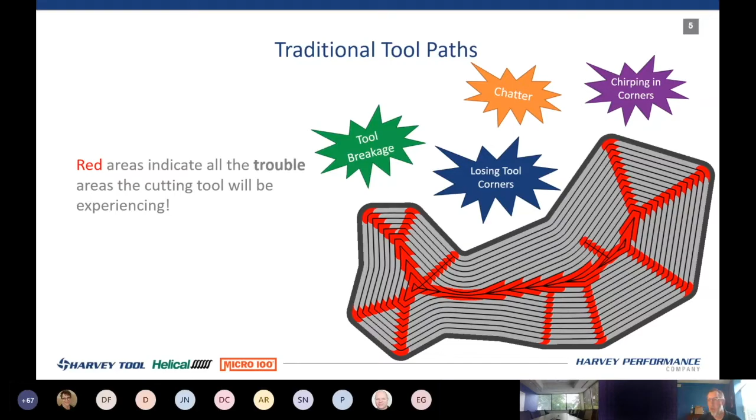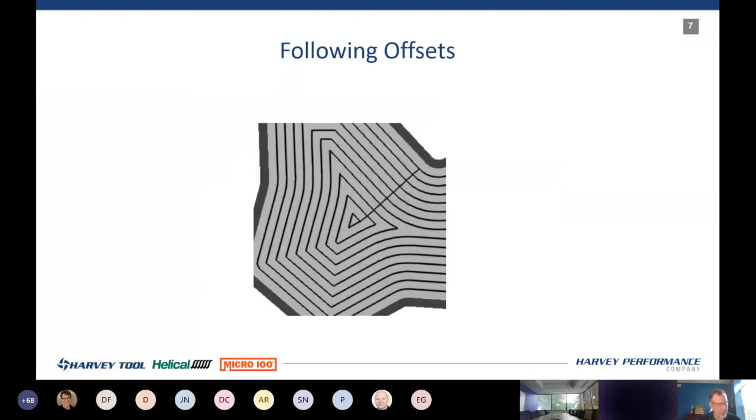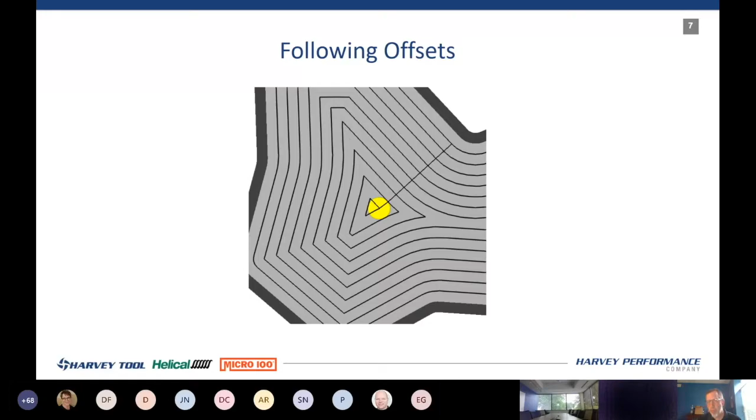So let's break down this tool path a little bit, just so I can explain what's happening in a traditional tool path. If we take a look at this, this is a pocket mill, right? Pocket mill, we think, hey, we're just cutting a pocket. It's a traditional tool path, we have an offsetting, but we're pretty much putting the end mill in a good situation. Well, after you ramp down or drill a hole, the first move that an end mill is going to make in a traditional tool path is what? It's a full slot. So the first path it's going to make in a traditional tool path is going to be a full slot. Anybody out there who has machined with an end mill knows that a full slot is going to create a bad situation.

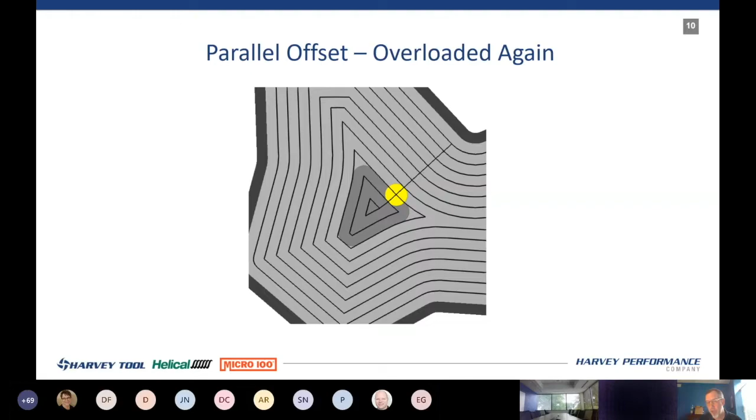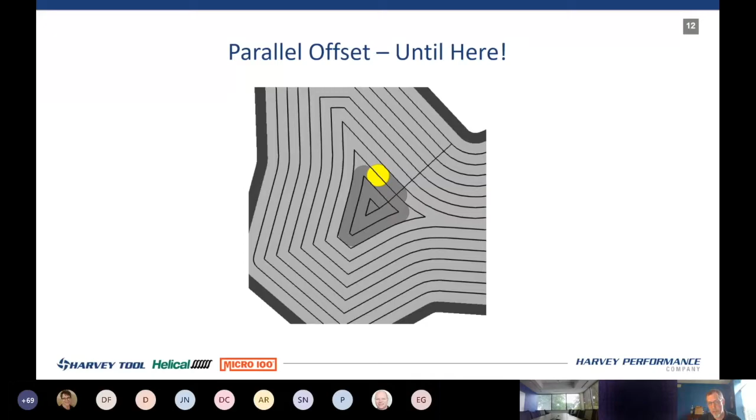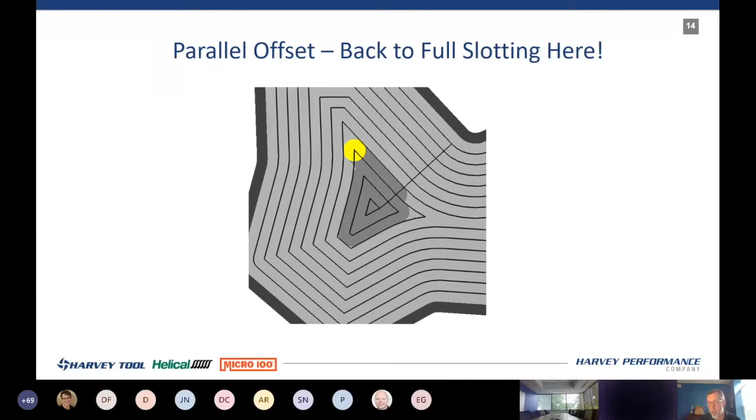So after we clear out a little bit of that and make another pass, we're doing a parallel offset, and look at what happens again. We're engaging the end mill again in more of 180 degrees of a radius. So again, full slot condition. As we're running to the corner, things are looking good. This is kind of where we all program things, right? In a traditional like this, it's a peripheral cut. I'm stepping over 40%, here's my speeds and feeds. Not when you're getting into that corner. You start getting into that corner again, where we're going to make another move, and we're actually in a full slot condition again.

Even if we come from the outside of the part in a traditional tool path, what's the first path we're taking? It's a full slot condition. So the right way to program any kind of traditional slot or a traditional pocket is by what? Worst case scenario. So this whole tool path that I just showed you should be programmed with worst case scenario, which means if you want the best life out of the end mill and you want that end mill to be predictable and work well, you have to program this for a full slotting condition.

Which is going to reduce our speeds and feeds. It's going to reduce how much axial we can take. It's going to reduce how many flutes we can take. And we're going to have a lot of scenarios and a lot of conditions that are going to put the end mill in a bad situation. Now, we're leading up here. This is like a story. So high efficiency milling, what we're trying to do is we're trying to take all the conditions out that make that end mill struggle and make it smooth. So the last thing and the last problem you have is going to be the end mill. We don't want you to worry about the end mill.

So milling challenges, again, machine tools: older machine tools, limited processing speed, limited look-ahead ability to actually read the code. A good example of that is maybe a traditional toolpath, if there's any G and M coders out there, might be 500, 600 lines of code at 12 inches a minute. Well, when we do an HEM or a high efficiency toolpath, that now just went to 10,000, 20, 30,000 lines of code, depending if you're putting a micro lift in there, and you're now running at 150, 200 inches a minute. So the processing speed on that machine has a lot to do with it.

Let's take a look at another challenge, part fixturing, right? Part fixturing is a big one, especially as your materials get more heat resistant and harder and stronger. We have rigidity issues with this, right? We have part movement, depending on how you're holding it. Support is a big one, right? Anytime your tool or your material is hanging over the support mechanism, it becomes like a diving board. And the diving board, the further you get out, the more it's going to spring up and down, the more it's going to be detrimental to your tool life. So it's important to be mindful of these things.

Clearance. How big are the toe clamps that are over the top of that part? How much are they hanging down? How much do I got to pull out that end mill? Clearance is a big one. Location. I love to bring up location when it comes to horizontal. I've walked into shops and I see where the vise is on a horizontal tombstone, and they'll have the vise all the way at the top of the tombstone, but nothing on the bottom. Be mindful that if you can bring all that down, that center of gravity, the rigidity, all the way down on the fixturing, you're going to have a greater chance at success.

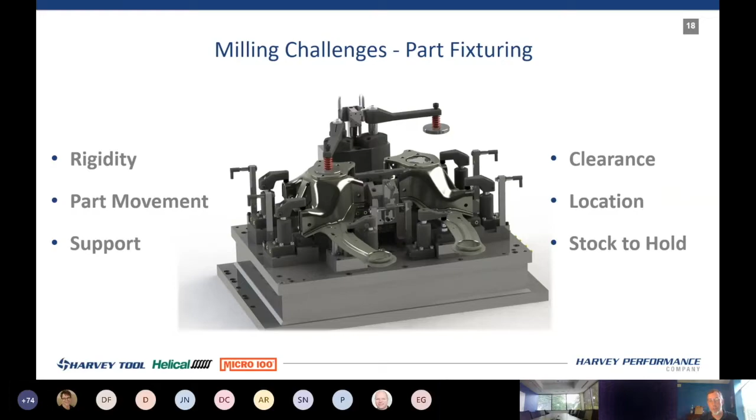Stock to hold. What does your stock look like? If we're running a casting, you might run into a fixture that looks a little bit like this, but you have to be mindful on support, rigidity, and everything to make sure that your part's not going to move, because that's where you're going to get your chatter, and that's where you're going to get all your chipping, vibration, and tool deterioration.

Tool holder accuracy, right? What's our holder look like? It's very important. The part that connects the tool to the machine is the holder. It's important to get a really good holder. Old technology holders, side lock. People will still use side lock. Push that end mill to one side, you get TIR, you get indicator issues, you get vibration in there. It's important to make sure that your holder has good taper condition. Pull stud is in good condition. I've seen a lot of people where they're not mindful of the pull stud.

It's important to make sure the pull stud matches the machine and is in good condition and tight. Excessive runout: we're looking for 5/10 or less. You should demand 2/10 out of your holder all day long.

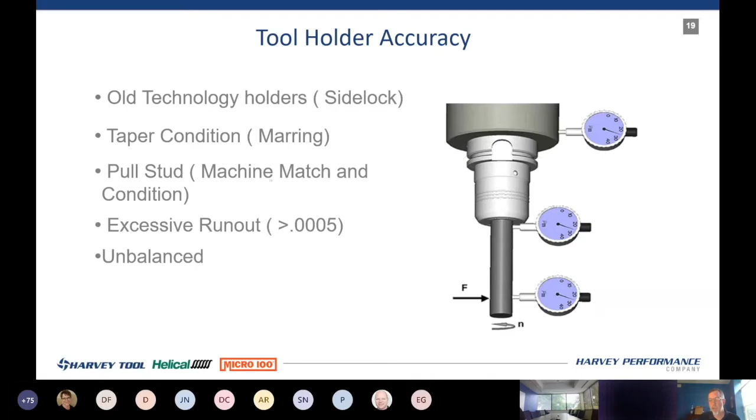That is not something you shouldn't ask for. And unbalanced holders - it's important to make sure the holder that connects the tool is very important.

Underutilized tooling. So now we can start getting into the tooling. If you're running a traditional tool path, we already know right away with that tool you're using it's going to be underutilized, which means we're going to run a conservative speed and feed. We're going to run a smaller axial depth of cut with long lengths of cut. This is where we're just dropping down 15, 20, 100 thou with that end mill, even though we have a length of cut that might be 1.25 inches, 1.5 inches.

I always say it's like going to Subway and buying a 12-inch sub and only eating 4 inches of it, throwing the rest in the garbage with no intentions of eating the rest of the sub. Buy the length of cut that you need for your situation and that end mill.

Now, if you're running a prototype, it's a little bit different. So I'm not standing here slamming my fist down saying you have to use that type of tool. But if you're running a production environment, it's very important to use the length of cut on the end mill that's going to be conducive to your program.

No corner radius - put a corner radius on there. It's underutilized tooling; you get poor tool life, unpredictable failure. We're trying to get predictable failure. We want it to be predictable.

Deflection. We get a lot of deflection by taking light axial depths of cut and heavy radial depths of cut, which is going to bring in your chatter, and it's going to give you low MRR that we're going to actually talk about. So now let's just dive into what is high efficiency milling.

What is this? We like to say the 3 T's of HEM over at Harvey Performance. You have the tool path, you have the tooling, and you have the technique. Those are the 3 things.

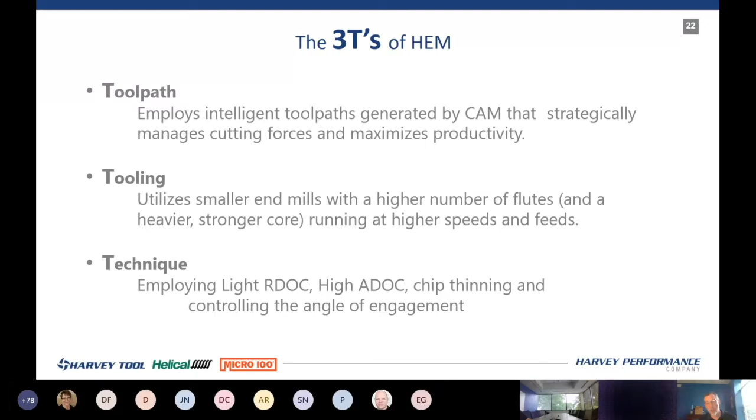We're going to control the angle of engagement, which means if we control the angle of engagement, we can control how big the chips are, and we can control how many flutes, and we can make an end mill that's a lot stronger. So those are the 3 T's.

Intelligent tool path - now you can take a look at this strategy here. And this strategy, instead of slamming into corners, we're actually picking out the corners. This is a dynamic toolpath from Mastercam. This is something that is within the CAM software that's going to manage the forces on your end mill. That's what we want to do - we want to manage the forces with HEM on your end mill.

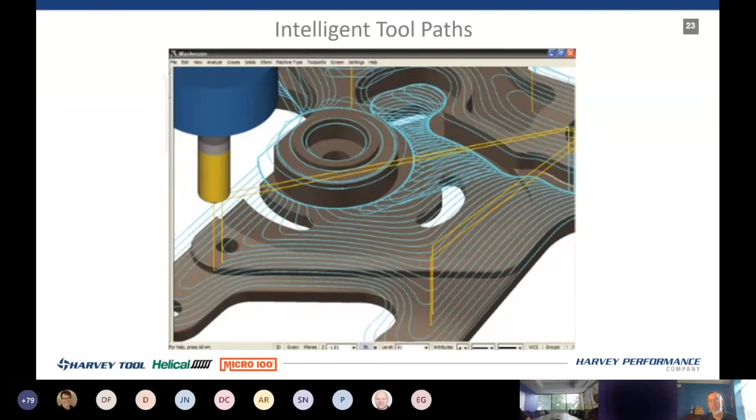Dynamic toolpath is going to do that. And you can see in this where it's actually picking out the corners and making sure that end mill is in good condition. So now that we're taking light radial depths of cut, we're taking heavy axial depths of cut, instead of using the 2, 3, 4 flute end mills, we can start going up to 5, 7, 8, 12, 16.

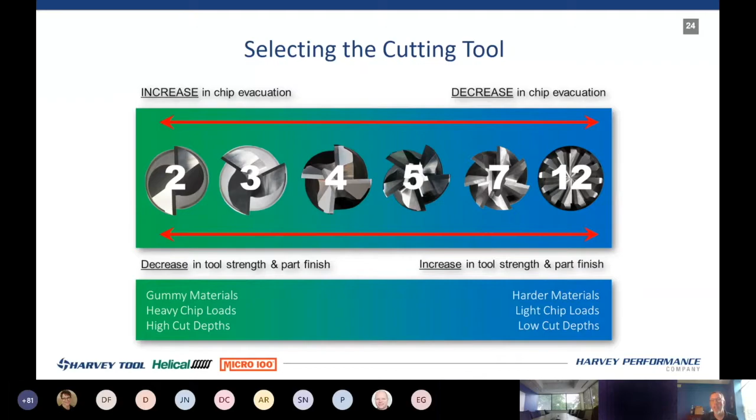You can really start managing your end mill with your flute count for your material, your radial step over, your core strength, your rigidity, and everything else. So now that we can get a tool path that's managed and a strategy for HEM, we can really start utilizing the tool and making sure we're using it to its fullest potential.

So you don't get a stabilization of the end mill, okay? And this is what brings vibration. It's kind of a slapping effect: one flute in, one flute out, one flute in, one flute out. And we get a lot of chatter and chipping that way.

Because we're taking a light radial depth of cut, we take the heat out. Now we get rid of the heat. Heat's going to deteriorate the end mill, so now let's get rid of the heat by actually employing a lighter radial depth of cut, which means the flute is in the cut for less time.

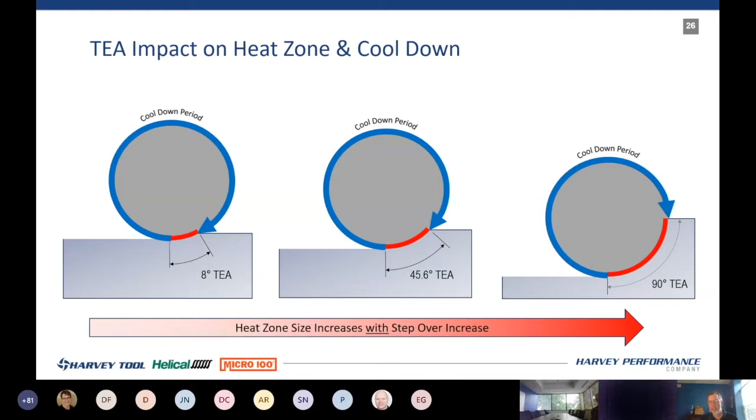So this is a great slide, and this is a great way to understand if you're cutting Inconels, Hastelloys, Monels, Nitronics, 13-8. Take a look at your radial step over and see if you can back off that radial step over to reduce some of the heat, depending on what your end mill looks like, and you will start getting better tool life. Now, it's not just the radial step over, understand that. We're going to dive into it a little bit more, but it's not just the radial step over.

There's a combination: chip thinning. Dangerous word, chip thinning. Chip thinning is basically when you take an end mill and step over less than 50% of the diameter. A good example is a half-inch tool: if I'm stepping over that tool less than 250 thousandths, it causes the chip that's formed to be less than what you programmed. So if you program a tenth-of-a-thou chip, inch per tooth, and you're at a 10% step over, that inch-per-tooth you programmed, that chip becomes a lot smaller and a lot thinner. And trust me when I tell you, as an engineer, as an end mill company, we recommend a chip thickness to get underneath the material and accommodate the rake on the tool.

If you're not actually taking the chip, you're going to deteriorate the cutting edge and you're going to have problems. So it's very important to maximize the chip.

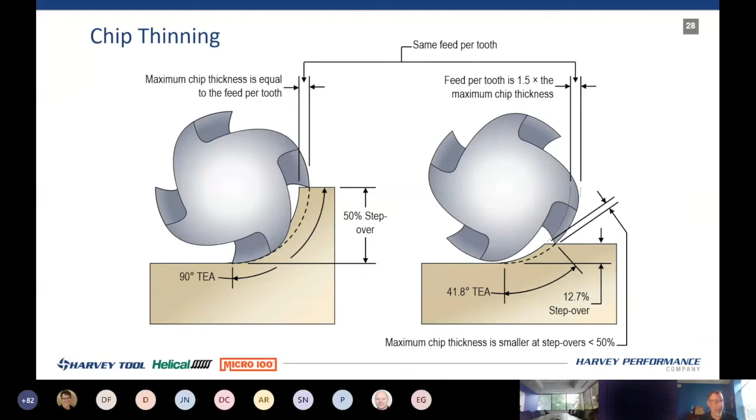So when the chip gets thinner, how do we get it thicker? Well, we speed it up. We run faster. Faster means I can get more cycle time. So now that we're employing a light radial and taking a heavy axial, we can also start running faster because we have chip thinning.

Tool engagement angle also has a lot to do with it, TEA. As we start reducing the radial step over, our angle of engagement on the material becomes smaller. Look at the one on the left, 50% of the diameter, the angle of engagement is 90 degrees. As we go all the way to the right, that angle of engagement gets smaller.

So why is this important to have a smaller angle of engagement? Well, number one, it's important because the chip is smaller. And if the chip is smaller, I can put more flutes. And if I can put more flutes, I can run faster. And if I can put more flutes, I get a bigger core. And if I get a bigger core, I get more rigidity. And it just keeps going and going and going.

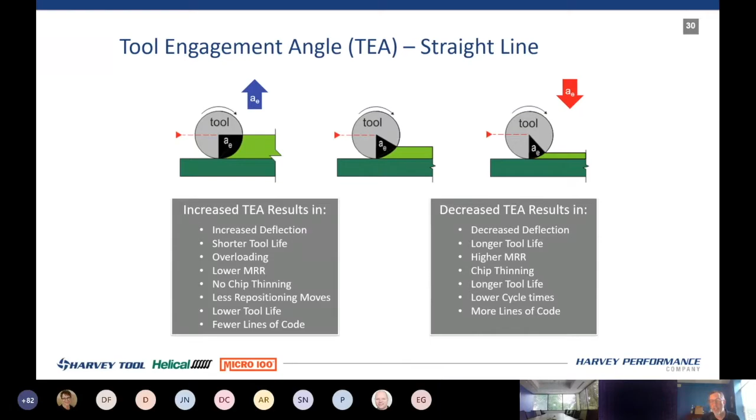So by controlling the angle of engagement, we can actually control the forces on the end mill. Now, the strategy, Mastercam dynamic milling, does this for you. But you want to be mindful of what that radial step over is recommended for that flute count for what you're actually doing.

So that angle of engagement is really being controlled. Because in a traditional tool path, when you go into a corner, angle of engagement changes. That's where we get the squealing, right? We run an end mill, goes in the corner, squeals, get chatter. Then we start running along the straight line, angle of engagement is manageable. Believe it or not, when it goes to the outside, angle of engagement gets smaller, chip gets thinner. So we're not managing the forces in a traditional tool path. We want to do that.

You start getting squealing. A better desired situation is maybe to pick out the corners, but you're still doing it at a 90-degree offset. Your angle of engagement is still great.

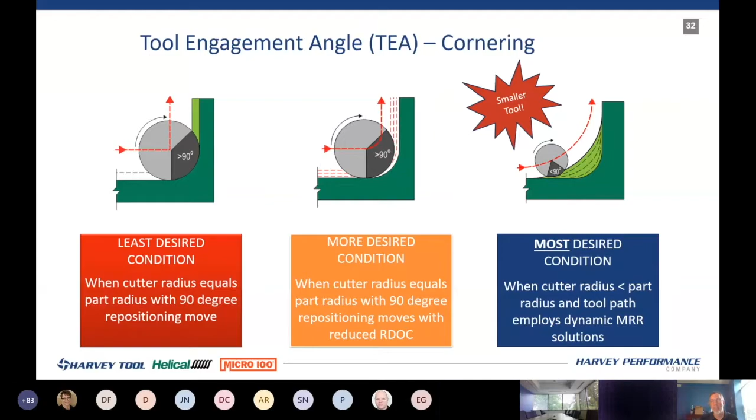I'm telling you, HEM, let's go with a smaller tool. Let's reduce the cost of the carbide. Let's pick out the corners with a higher axial, lighter radial, and let's control the angle of engagement, and let's get the tool life on there. That's what we're shooting for. That's what HEM does. It manages the forces in those corners.

Metal removal rate, or MRR, great calculation. This is how we kind of get judged on efficiency when we're actually programming something. How many cubic inches of material am I removing a minute, right? So there are three things to factor here: a radial depth of cut, an axial depth of cut, and an inch per minute, or a feed. So this is how you calculate cubic inches of material removed. It's your radial depth of cut times your axial depth of cut times your inches per minute. Take all three of those, multiply them. That's how many cubic inches of material you're removing per minute.

Example: my radial depth of cut is too great. It's choking out my end mill. I reduce my radial depth of cut. My end mill likes it.

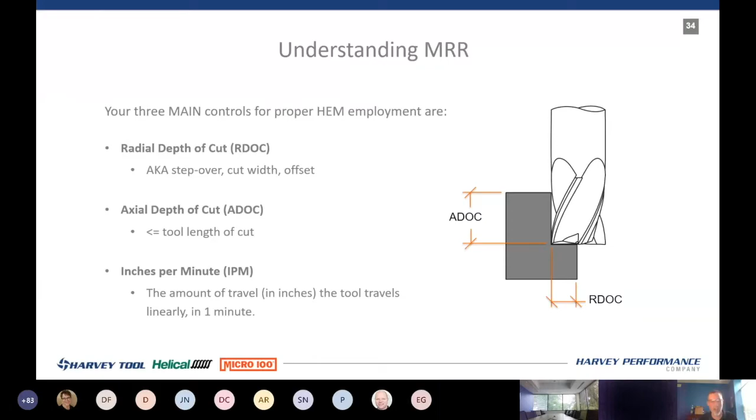It can manage the chips. Increase your inch per minute because we have more chip thinning. I can run faster, my MRR is maintained, and my end mill is in a good place. It's very important to look at all three of these things. Before you start throwing end mills out and getting a different one and trying something different, take a look at all three of these.

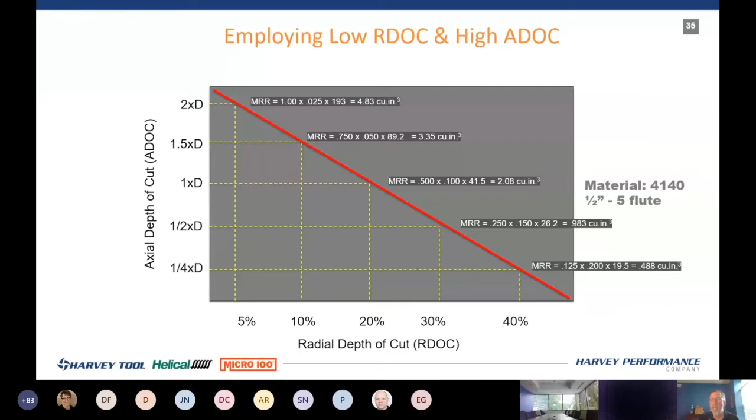If you look at MRR just based on radials and axials, I'm just going to focus on the one on the left and the one on the right. Two times D on the end mill, but only a 5% step over, gets us 4.83 cubic inches of material removed per minute. If we just go traditionally on the bottom, quarter times D, but 40% radial, so now we're hogging, the machine sounds good, sounds like we're removing a lot of material. Guess what? 0.488 cubic inches of material. Which one are you going to choose? Choose the one with the highest MRR, and it's going to be more conducive to your tool life, and it's really going to save on your machine tools and everything else.

Key questions to ask, this is what we're going to wrap up with. Is your tool holding optimal? Is that fixturing good? Are you in a good place? Does that look like it's in good condition? Are your part holding conditions ideal? Is your spindle condition in good shape? How many times did you crash it this week, right? I've been there, trust me. That's why I say that.

Does your shop culture fit this new methodology? This is a learning curve if you're not doing it, so it's something you kind of want to embrace this change. Are you willing to look at reducing your tool diameters? Of course, who doesn't, right? And now that diameter is conducive to how deep you're going, just be mindful of that. We can help with that too as well.

Do you have the CAM package that will support HEM techniques? Mastercam, dynamic milling, go for it all day long, that'll take care of it. Do you know your material exactly? What are the certs to hardness condition? It's very important to understand this to change those parameters. And are you roughing enough material? If you're doing a prototype, might not be as important as if you're doing a production run.

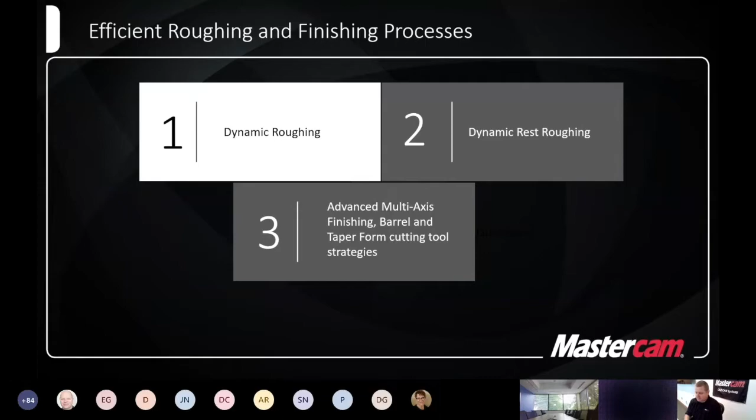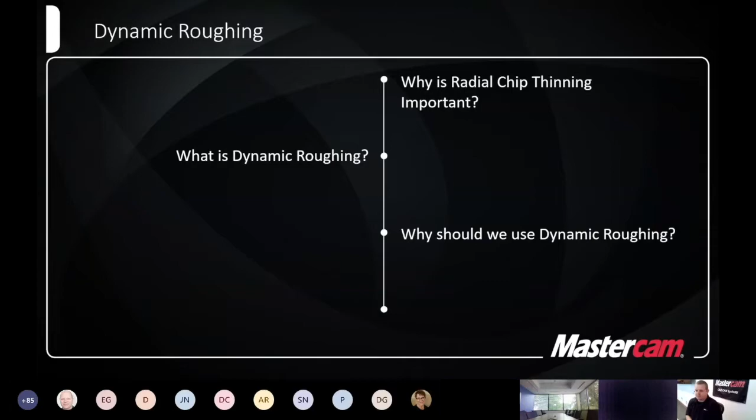So dynamic roughing. Why is radial chip thinning important? Don related to that a little bit, and we're going to see in Mastercam how we take care of that. What is dynamic roughing, and why should we use dynamic roughing? As the step over gets smaller, the chip becomes thinner, obviously, and we must increase the feed rate to maintain the chip load. Mastercam will do this automatically for you in dynamic toolpaths, so there's not a whole lot you have to do.

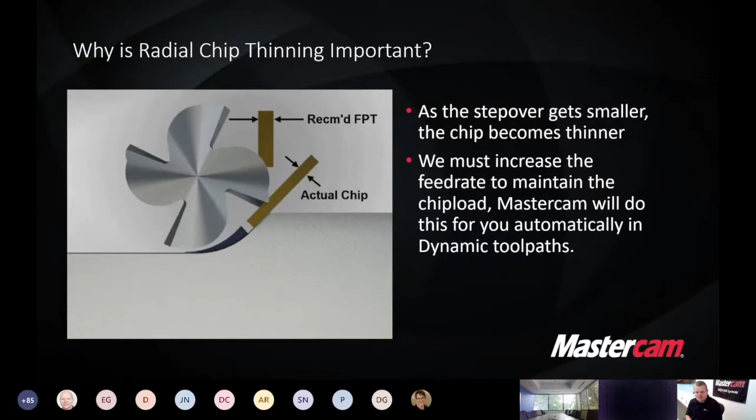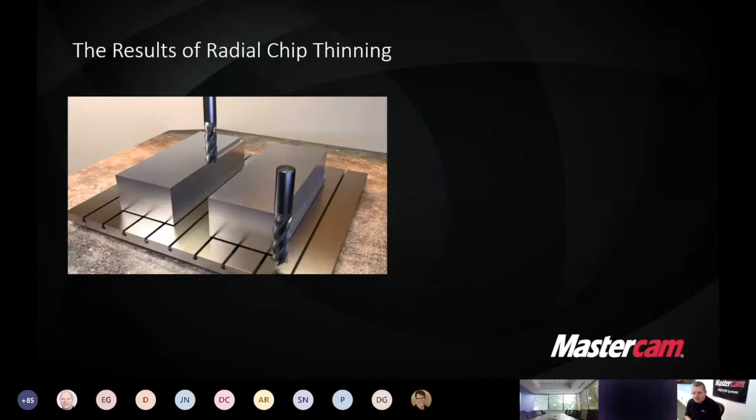Just got to plug in the correct numbers, and Mastercam will take care of the rest for you. So the results of radial chip thinning, as we can see here, a smaller step over allows us to use a much larger depth of cut. This results in a much higher material removal rate. Obviously, if we can use the whole end mill and cut to full depth with lighter step overs, you're going to decrease your cycle time dramatically, other than the traditional tool paths of a large step over.

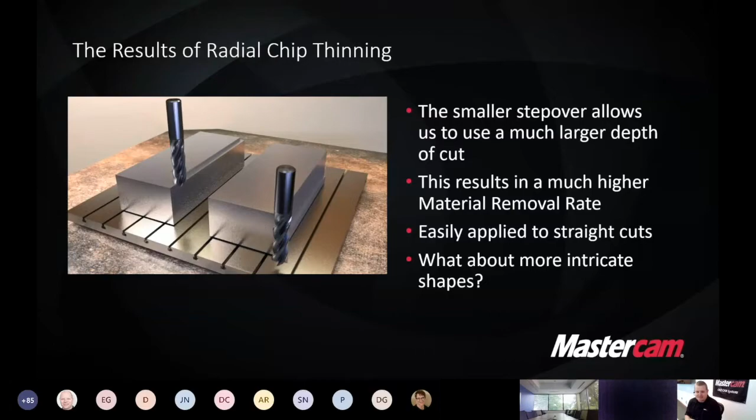This is easily applied to straight cuts. What about the more intricate shapes, complex pockets, radial features, stuff like that? Well, the answer here is dynamic roughing.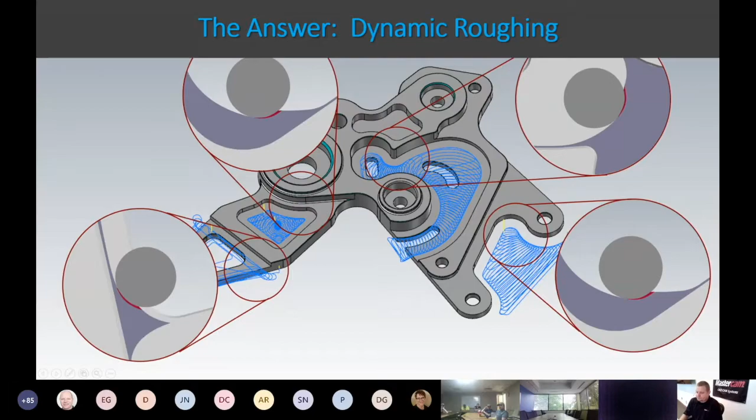Dynamic roughing in Mastercam takes care of pretty much every scenario you need, utilizing radial chip thinning, so we're never going to over-engage or under-engage our tools in these tool paths. So what is dynamic roughing?

Mastercam's dynamic roughing applies the principles of radial chip thinning to all parts, regardless of size and shape. This works for everything. It doesn't really matter what you're cutting, these tool paths can apply to that.

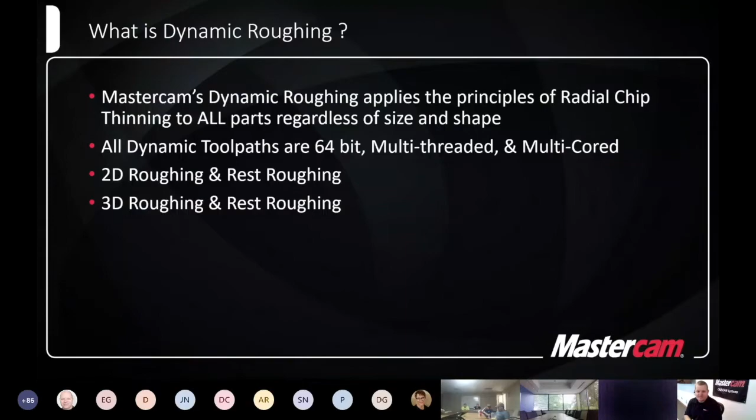All tool paths are 64-bit, multi-threaded, and multi-cored. What that means is it's going to process faster when you're programming. We have 2D roughing and rest roughing, and 3D roughing and rest roughing that we'll talk about.

Dynamic roughing continuously adjusts the tool's trajectory to maintain a constant chip load. Dynamic roughing uses a constant feed rate, and dynamic motion is not a feed rate optimizer. So I want to discuss this a little bit. We use a constant feed rate.

You get this from your tooling manufacturer, like Harvey Tools. They'll give you the feed rates you're supposed to be running. Mastercam outputs that feed rate and does not change it. We are not a feed rate optimizer.

This is the difference between us and some of our competitors. We don't slow down and speed up our feed rates in our program. We apply different step overs if we are in a situation where our chip is thinning out or getting heavy.

As you can see in that picture there, at the corner the chip load is going to be lighter, so it takes a little bit heavier cut to maintain chip load. That's what this is all about.

In the next video here, it's going to be dynamic motion versus traditional motion with a little time study on it.

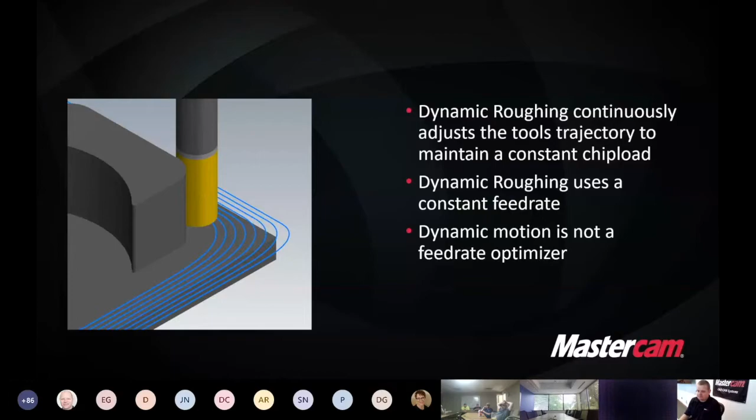This is what we typically see across the board, usually a 60 to 80% cycle time reduction when we get people to switch over and try this strategy.

Why use dynamic roughing? Tool is always in the optimum cutting condition. Along with faster cycle times, we're also seeing tooling last 10, 20, 30, 40 times of what it typically would with traditional tool paths. Very important.

Faster run times. With these tool paths, now we're seeing feed rates of 2, 3, 4, 500 inches a minute. Not out of the question here. So obviously your faster run times are going to come from a lot faster feed rates.

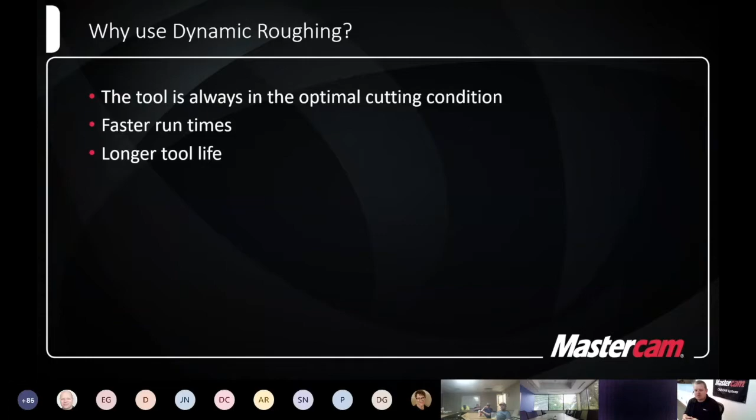Longer tool life, kind of what I was talking about before. If we're in our optimum cutting conditions, our tools are running where they're supposed to be running for chip load, they should last longer.

Reduced programming time. Dynamic tool paths are easy to program. Mastercam takes care of our tool path for us and takes care of the step overs and everything else so we don't over-engage our tool path.

Easy on the machines. Something that in my mind kills machines is when you go into a corner and it chirps at you. With these tool paths, it's impossible to T-bone into a wall or go straight into a corner and take a left. So it should be a lot easier on your machine to not overload your spindle constantly.

Heat is carried away by the chip. Parts are cooler. When we do these cuts, we typically try to cut them dry. Right after we're done with the cut, you could typically go and grab that part and it's lukewarm from when we put it in, because all the heat is carried out with the chip.

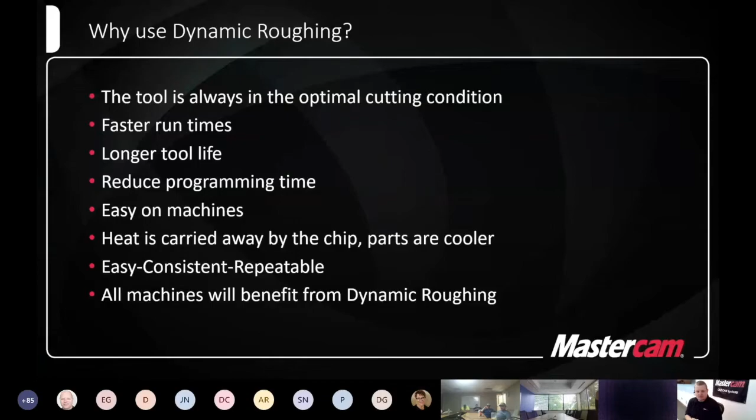Easy, consistent, and repeatable. You can take a lot of different scenarios, a lot of different parts, and you're going to get the same results with every part, depending on your setups there. And all machines will benefit from dynamic roughing. So if you have a slower machine or a faster machine, they'll all benefit. There's no restrictions here.

So that's kind of our dynamic roughing, a little bit into that, a few questions answered there. We're going to move into stock model and rest roughing next and why this is important. So we're going to talk about what is a stock model, what is rest roughing, and is this efficient? So what is a stock model and how can a person use a stock model?

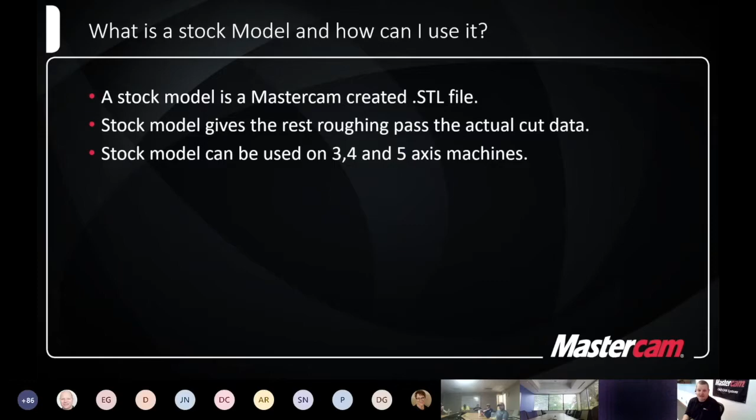So a stock model is a Mastercam created .stl file. So pretty much it's building an STL file with the data that you give it through Mastercam on what you want to see. Stock model gives the rest roughing passes the actual cut data. So when we come back with a smaller tool, now we're going to take the data out of this STL file so it can calculate a cut from there. Stock model can be used on 3, 4, and 5 axis machines. Really no limitations here for machine.

Visualize what is left over from your roughing op. So you can see what's going to happen, or in the machines when you open the doors, you should be able to get a visual effect on that. Elimination of air cuts. We're going to keep on coming back to elimination of air cuts. Something I see a lot in the industry is a lot of people cutting air. The stock model is used pretty much mainly to eliminate air cuts or bad cuts. So if we're going to do our HEM principles and go fast and be as efficient as we can, if we're cutting air down the road, it's really not going to do us much good at the end. So elimination of air cuts, huge.

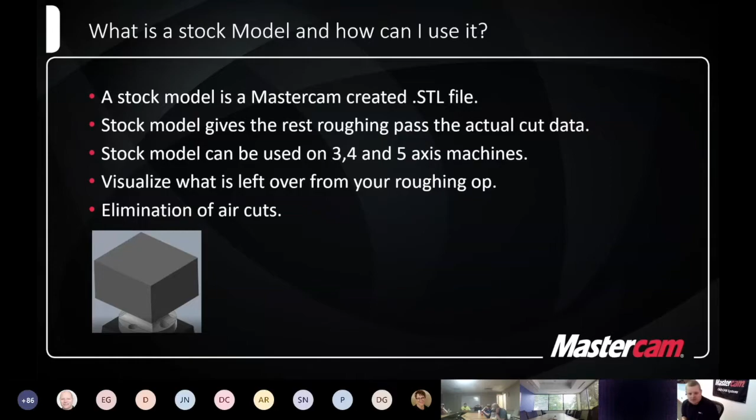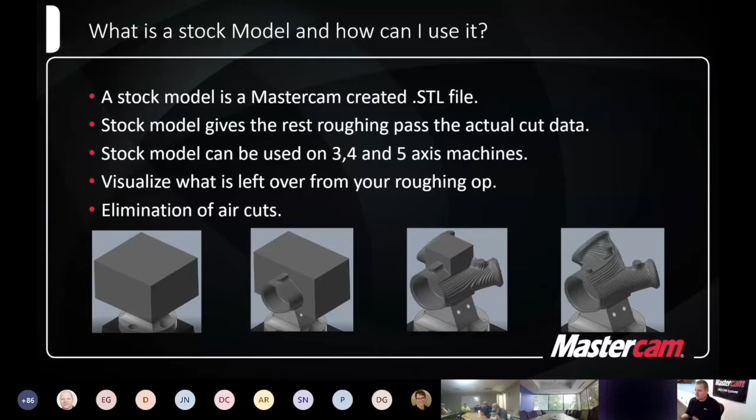And here's a stock model. So we start with just a piece of stock. Our first op was going to look like this, and this is what Mastercam can create to reference from. Third picture is after first, second, and third op. Now we got some stock left over in the top center, and then our finished part here. So that's what we can create in Mastercam.

So in process stock tracking. So you use Mastercam stock model to represent the stock shape like I showed you previous at any point in the process. Track the stock from index to index when doing 3+2 roughing. So if we have a machine that can index, now we can cut the first op, and if we index it over, now it's not going to apply air cuts where there's already material roughed out.

And once again, track the stock across multiple setups. Maybe this would be a multi-vise setup where you're manually switching them parts out. And once again, we're going to eliminate air cuts as we go to the next op. So elimination of air cuts by processing off of a stock model.

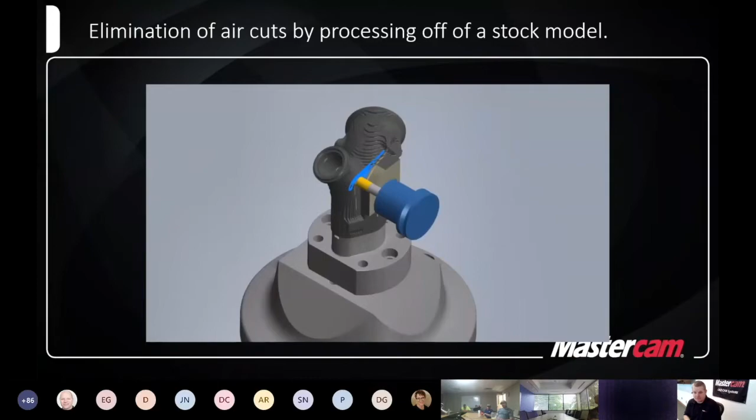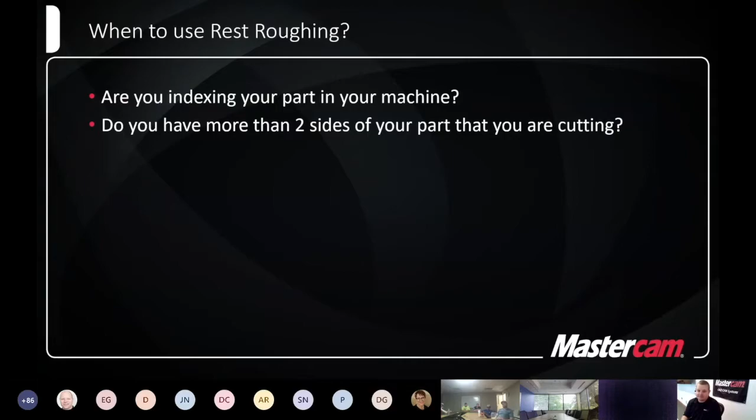So when to use rest roughing? So when should we do these strategies? Are you indexing your part in the machine? And these are questions you have to ask yourself and if it can be useful. Do you have more than 2 sides of your part that you are cutting? Do you cut complex parts with a lot of features, a lot of pockets, hole features, all sorts of stuff going on in there? Roughing cycle times, bigger tool, bigger step overs.

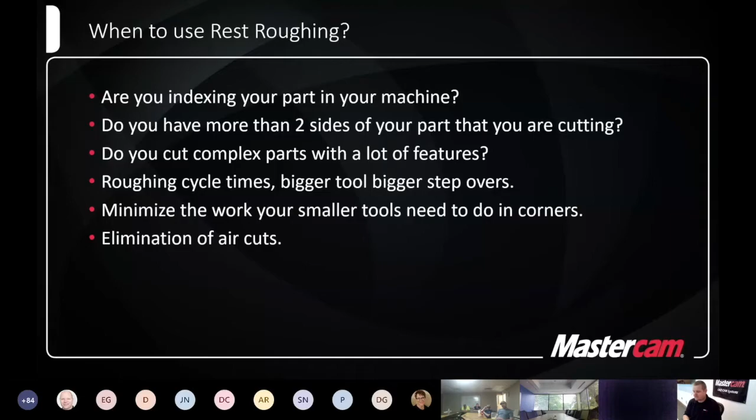So if we can use a bigger tool and come back and reference from what's left over, maybe we can save some time there. Minimize the work your smaller tools need to do in a corner. So if you can come in there and just reference what's left over, your smaller diameter tools can come in there and not break off. They know exactly what's left over in them corners. And once again, elimination of air cuts. Coming back to that again, but that's kind of the main deal here. We want to eliminate air cuts to be efficient.

So indexing on a 4th or 5th axis machine. So after cutting the first side in this situation here, a stock model is created to reference from.

But what about 2D pocket style features? We've been looking at more of the 3D parts there. We can, by using a tool with a bigger radius than the finish radius in the pocket. So this would be a case where you're taking a 1/2 inch end mill, maybe going in and pocketing out as much as you can, coming back with a 1/4 inch or a 3/16 to finish out the corner radiuses.

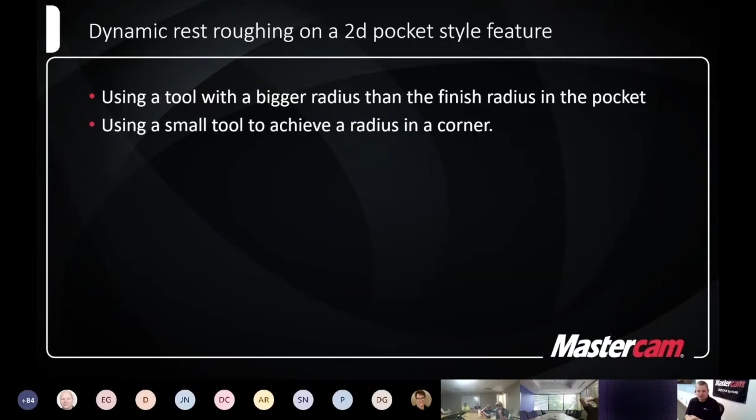Kind of the same thing here, using a small tool to achieve a radius in a corner, same situation there. And if you don't want to make a stock model, you don't have to in Mastercam with 2D pocket style features. We can utilize a stock option right in our Mastercam toolpaths to pick an operation to calculate from. Pretty much what that means is it'll look at a previous toolpath, see what material's left over, and then just put cuts where there is stock left over, to eliminate any air cuts, over engagement, anything like that.

So our rest roughing really caters to the high efficiency machining, just in a smaller platform of saying what's left over, where should I apply my cut so I don't over engage or under engage my tools. So absolutely take a look at some rest roughing. It's a huge elimination of air cuts and optimizes your smaller cutters.

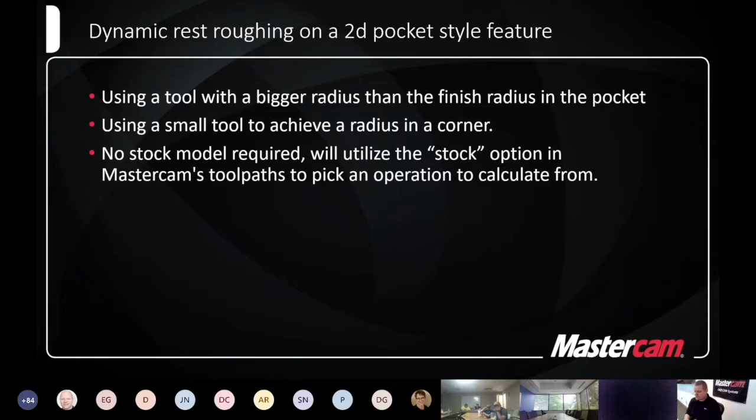The last topic we'll discuss here is advanced finishing with circle segment cutters. In my opinion, this is going to be the next big thing. And this is for finish strategies. So typically with a ball end mill, if you're traditional tool pathing, you have small step downs to achieve your surface finish. So we're going to answer some questions here with these advanced finishing circle segment cutters. So what are barrel and taper form cutters and why use them? Advanced finishing with 3-axis machines and advanced finishing with multi-axis machines.

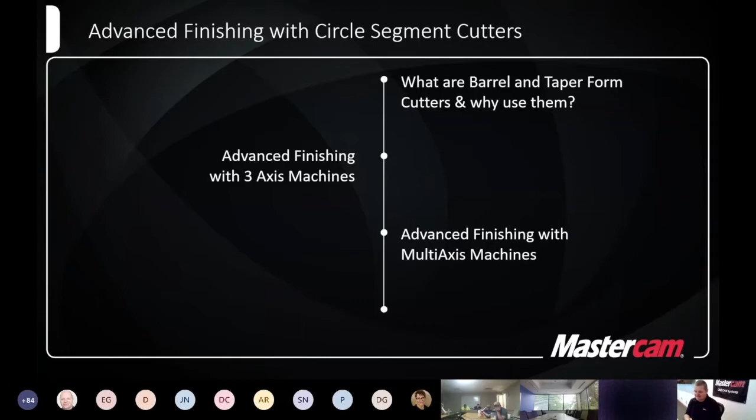So what are advanced finishing cutters? They are small diameter tools that provide a large effective cutting radius. These tools vary depending on who's grinding them. Harvey is now grinding these tools. I've seen some that have anywhere from a 3/4 inch radius on the side to 3-4 inch radius on the side. So it really depends where you're buying your tools. The shapes they typically come in are barrel form, taper form, and lens form. And they're available in solid carbide and indexable. So go to your tooling vendors, Harvey Tools, see what they have available, and then go from there.

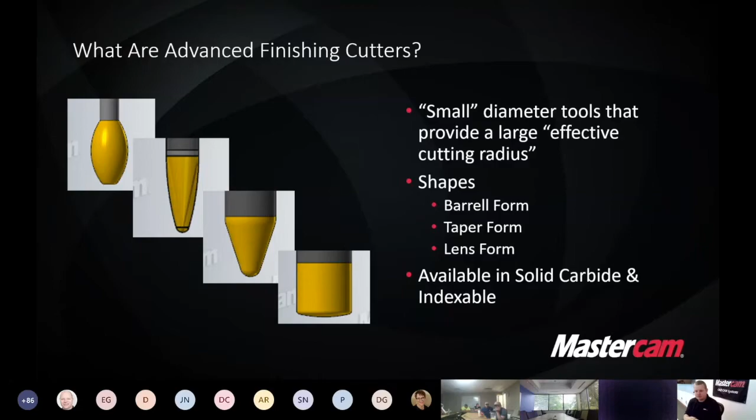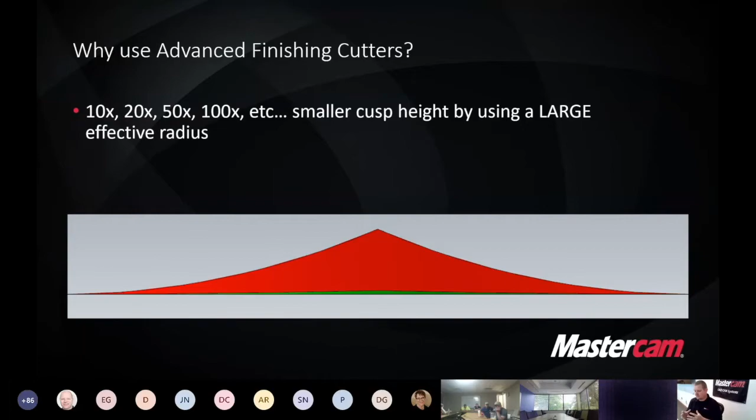So why use advanced finishing cutters? 10, 20, 50, 100 times, etc. Smaller cusp height by using a large effective radius. What this is all about is the huge effective cutting radius on the tool to eliminate the scallop. So here's a little illustration I put together. A larger tool radius equals a small scallop. A small scallop equals better surface finish quality. And here's a comparison of what we're talking about. If we're taking an 1/8 inch ball end mill and a 1/2 inch ball end mill and stepping over the same amount, you can see the scallop in between the cuts is obviously going to be a lot smaller.

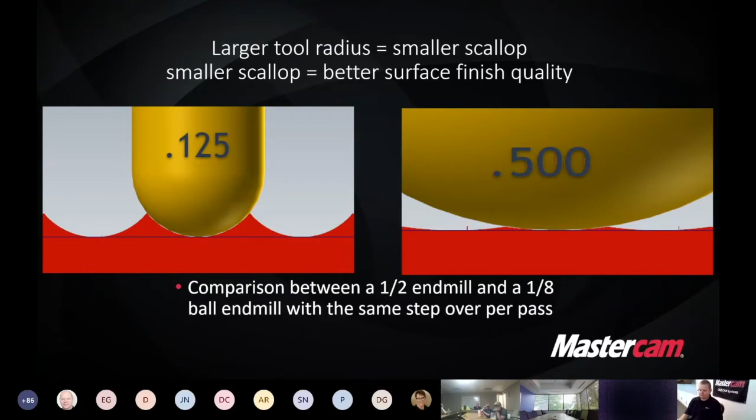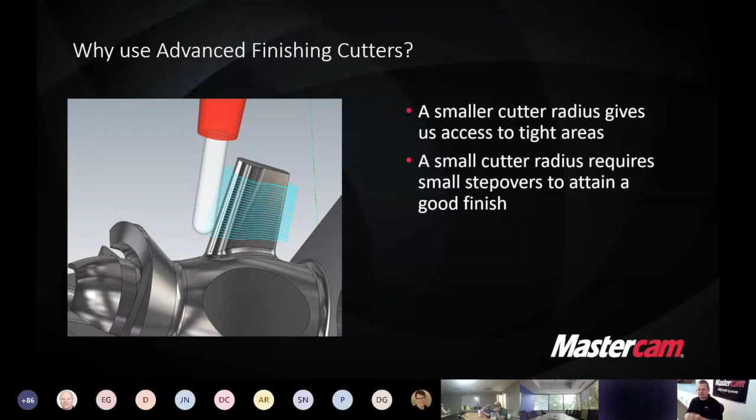Now I was just talking, a bigger radius is going to give us a better finish at a bigger step over. So that is true, larger step overs to attain a good finish. But in this case here, a larger cutting radius does not allow access to tight areas. So we run into a lot of situations where we can't fit a big tool in between the features on the part, and we can't get close to the floors in this case either.

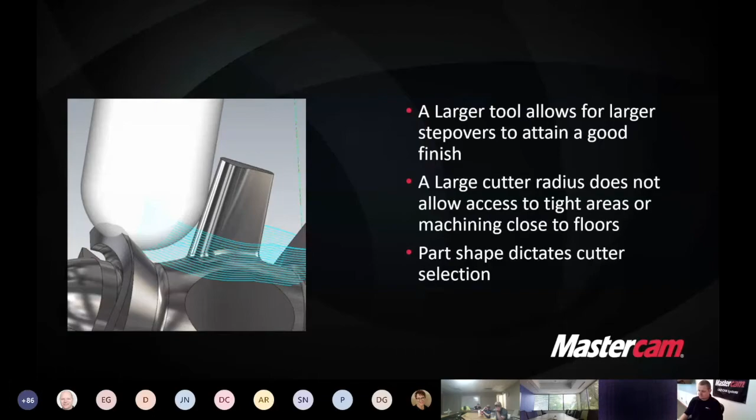So part shape here is going to dictate the cutter selection hugely. In this case here, we had a small ball end mill. The limitation there was small step downs. Big ball end mill, if we put that in, now we can't fit in between these features. So circle segment cutters, what we're talking about here, a taper form tool, provides the finish benefits of a large radius cutter while retaining the access of small cutters.

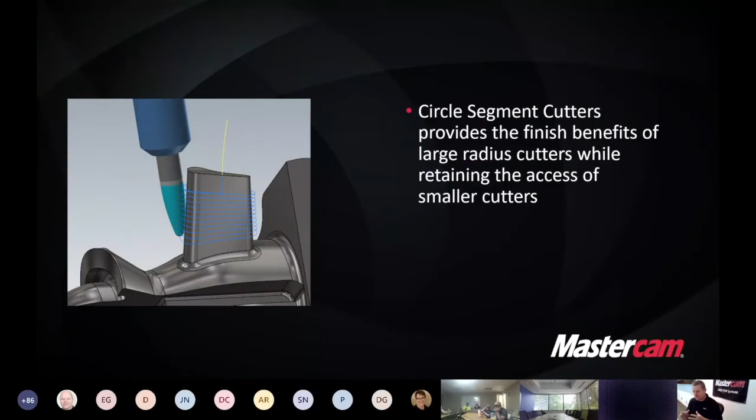So in this case here, in the same cut, now we can take a taper form with a large side radius on it, and we can be stepping down 30, 40, 50 thousandths to maintain the same scallop we would have had with a step down of maybe 5 thousandths, 10 thousandths. So it's huge.

3-axis machines, these are limited. I will say this, they're limited in 3-axis machines, okay? So we can still use barrel form, taper form for vertical and steep walls. Depending on the tool grind, you're probably not getting much over 10, 15 degree taper on a wall and be able to do it. So they are quite limited here.

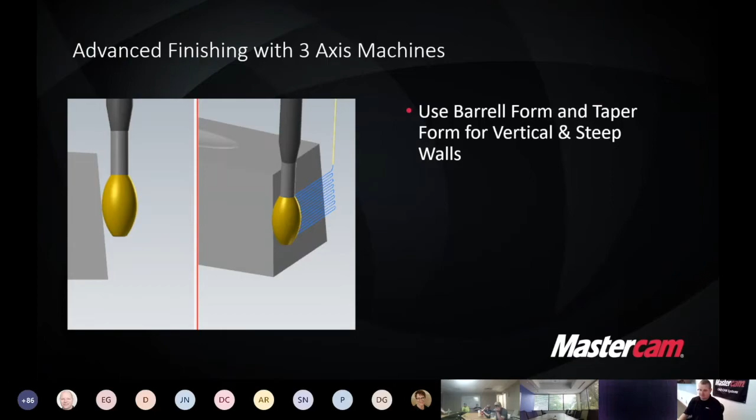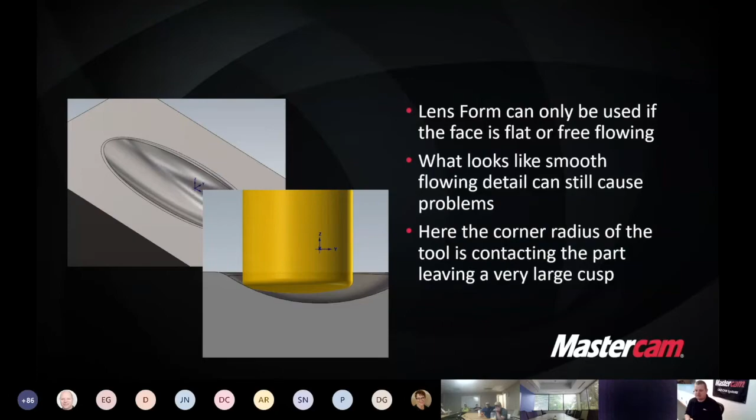As you see, the radius of the tool is contacting the part, leaving a very large cusp. So we'd be able to do the flat section. The pocket, we're still going to have to come back and do a different strategy with probably a ball end mill in that case. So they're not a fix-all, but for most situations, it's a huge time savings of what we can do here.

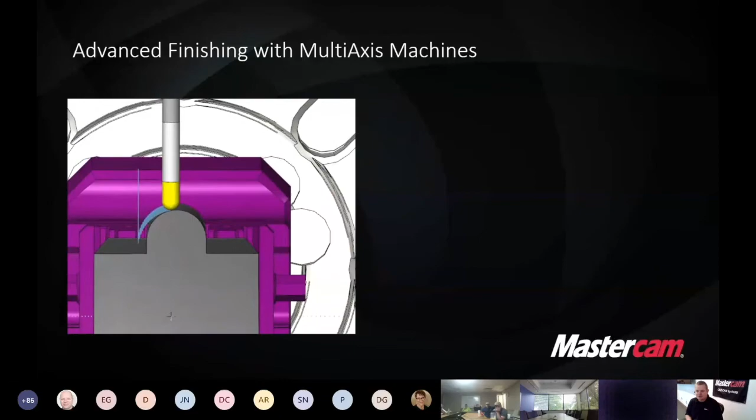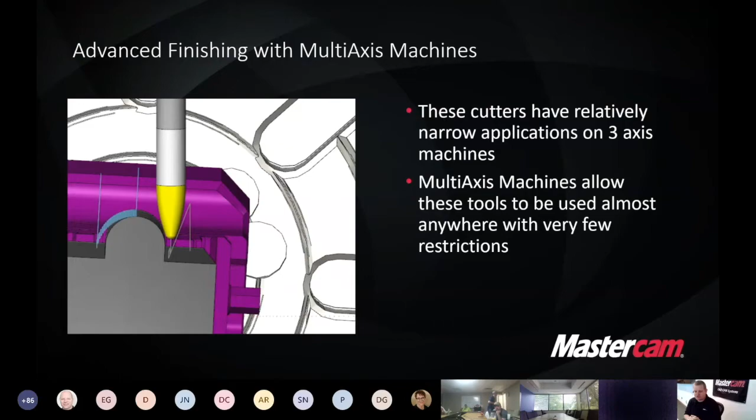So pretty much what I'm saying is you got a machine that has multi-axes in it where you can either cut while rotating or you can tilt or tip the part. There's a lot of situations that you can do and not a lot of limitations there. Now, we do have to be smart with this a little bit. Obviously, this is not a good application for this tool type. We're not cutting it like this. We'd be cutting it along. So you've got to change your programming around a little bit. Obviously, this is not going to work.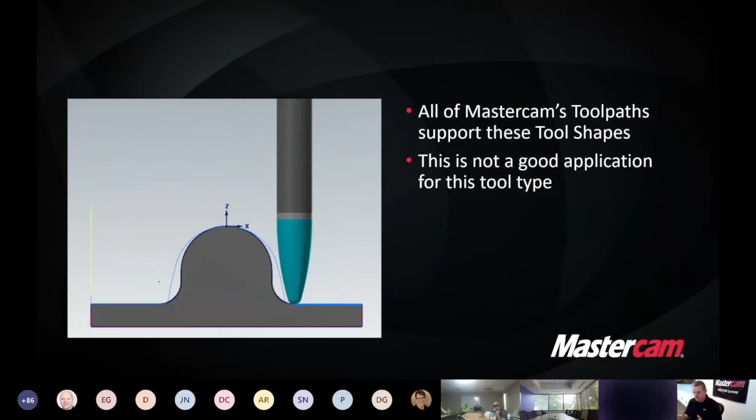And one thing with this is Mastercam's toolpaths support these tool shapes. That's very important to note. We've done a lot of testing to make sure that we can define the tools to drive off the tools correctly. We're one of the only ones that can do that by tool definition. So make sure if you have a CAM package out there that they can drive off these tool definitions correctly. Otherwise, you're going to have varied results there.

So we're still in our multi-axis state here. So we can tilt this tool or tilt this machine every which direction we want. So like I said, critical to the success is the ability to control the angle of the tool relative to the model at all times. So in this case here, we went into a multi-axis cut, either a morph or a parallel cut, and we decided to tip the tilt angle to 78 degrees.

That's going to make the tangency point near the tip of the tool, allowing the tool to finish close to the floor. So as you can see where the red is on the screen there, we're getting pretty close to the bottom of the tool with a 78-degree tilt angle.

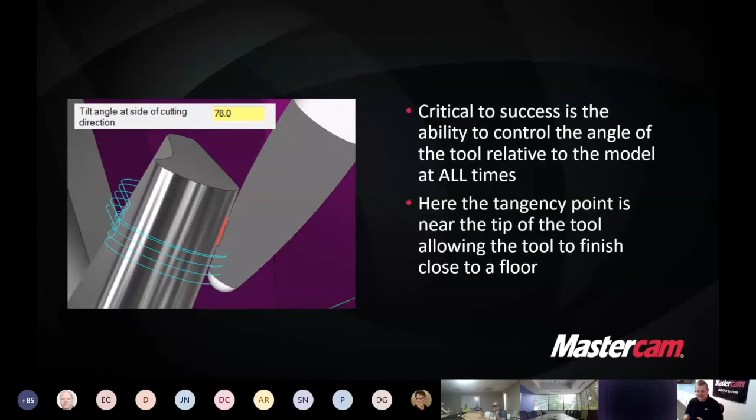Ideally, we would want to cut nearer towards the OD, so we have better surface feet per minute and better chip evacuation. We can simply do that by just changing the tilt angle to 85 degrees. Typically, you're going to be between 78 and 85 degrees, somewhere in there, depending on where you want to cut with these tools in the tool path.

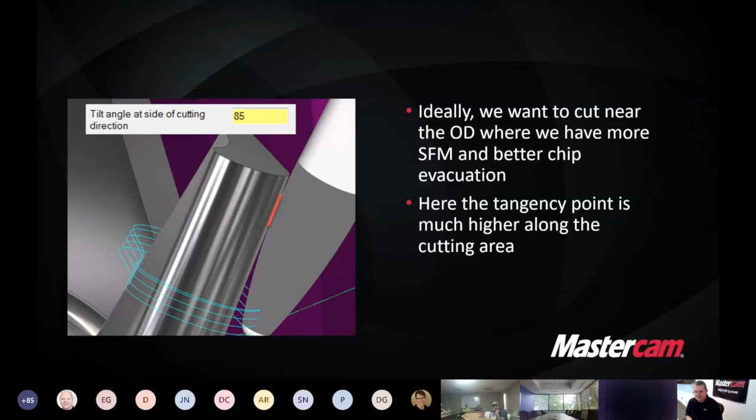The tangency point here is much higher. You're probably going to get a little bit better surface feet per minute out of that cut there.

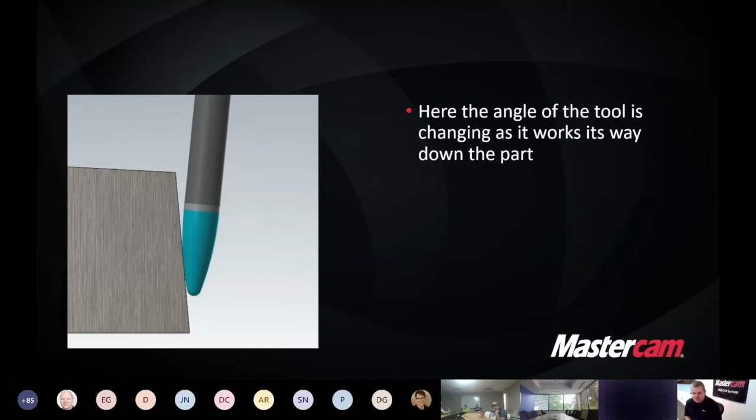In this case, the angle of the tool is changing as it works its way down the part. Great for spreading out the wear, bad because the surface feet per minute is not consistent. So when we program these, we've got to look at our strategies and our machine, and what we're able to do with that machine.

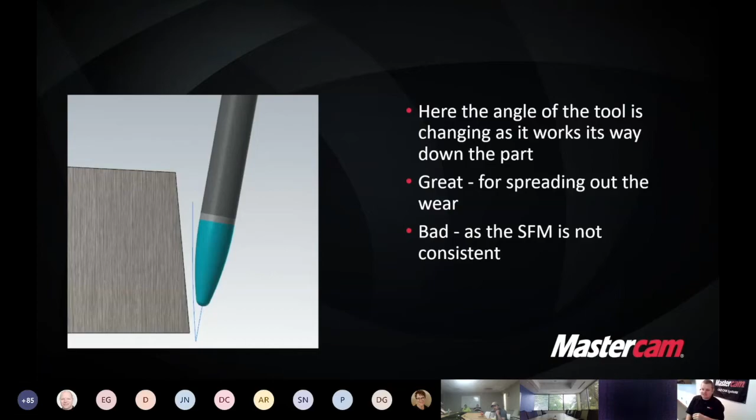If we can tilt the machine, maybe we can come in here and tilt at a certain angle and then just drive that tool right down that face. This would be a better situation instead of trying to tip the tool - just drive it right down the face after tilting with planes in Mastercam.

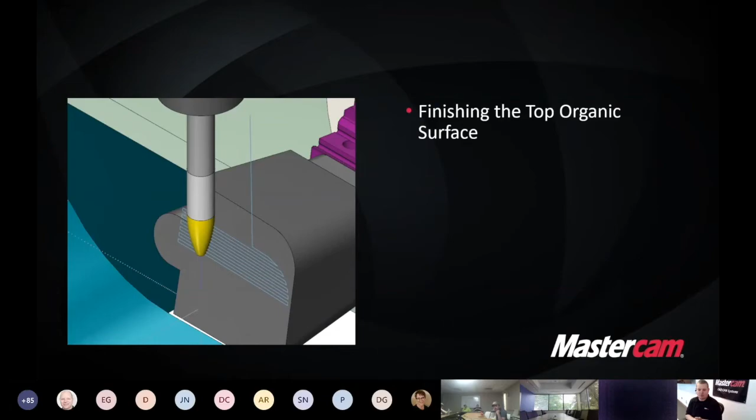We can finish the walls from the bottom up. So here's a true 5-axis cut, the part moving all over the place to maintain that 78 degrees, or between 78 and 85 degree cut tilt angle. As you can see, the part moves all around. So if you have a machine that has the ability to cut while rotating, a true 5-axis machine, you can really do some pretty radical stuff with these tools.

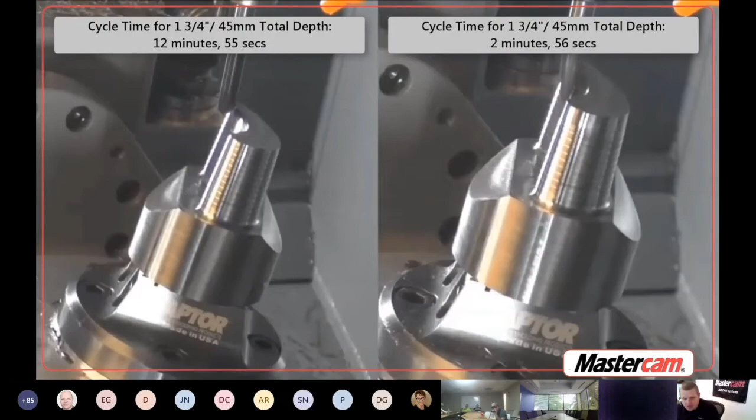In this video, I'll play a side-by-side comparison. The left picture is a ball end mill - it took 12 minutes, 55 seconds. The one on the right is a taper form tool - it's going to be 2 minutes, 56 seconds to cut the same distance and get the same finish qualities. That's going to result in a 77% total time savings.

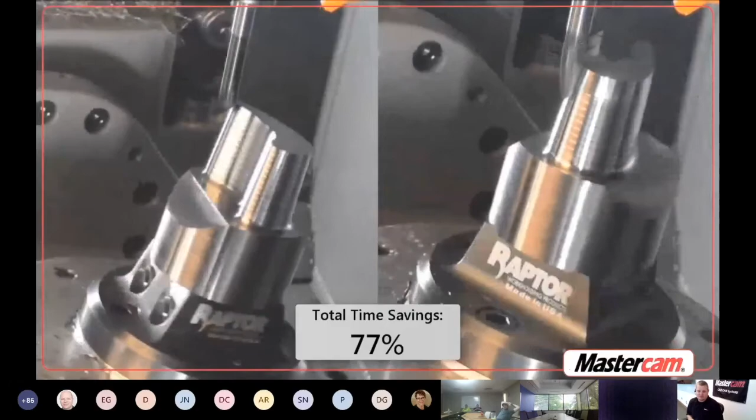And that's what we're seeing across the board. We're seeing some huge time savings for the people that are trying this out. Large radius circle segment tools allow for deeper step downs and fewer finish passes. I definitely highly suggest trying these if you're doing a lot of surfacing - I think you'll be quite impressed with the performance and the time savings.

We did test cuts here for productivity on the Hwacheon Vesta 1000. It's a very nice machine. If you guys are interested in looking at some new machines, this machine is decently priced, and it handled these high efficiency milling cuts very, very well. I was quite impressed with the machine, so definitely take a look at one if you're looking at a new machine.

We cut 4140 pre-hardened material. We used the Helical 7-flute half-inch end mill, running 8,500 RPM and 350 inches per minute. Around the outside, we went 1 inch deep. The center pocket cut was also 1 inch deep, with a couple of step ups there. These were all programmed by Mastercam's dynamic toolpaths. I programmed the part in probably 15, 20 minutes.